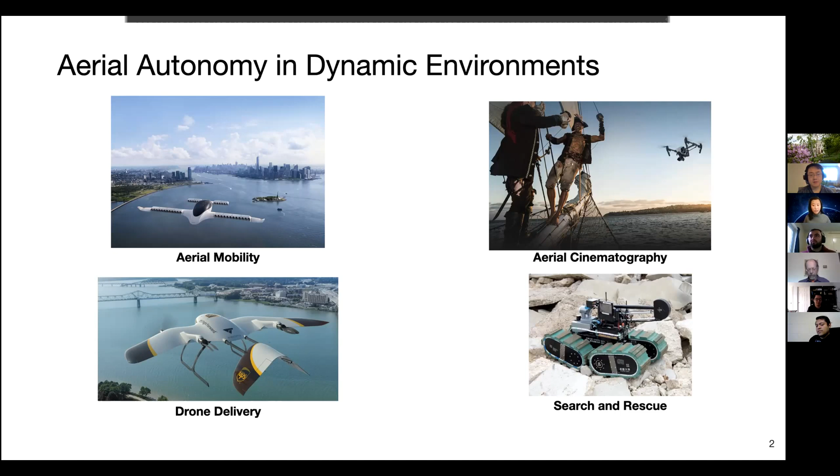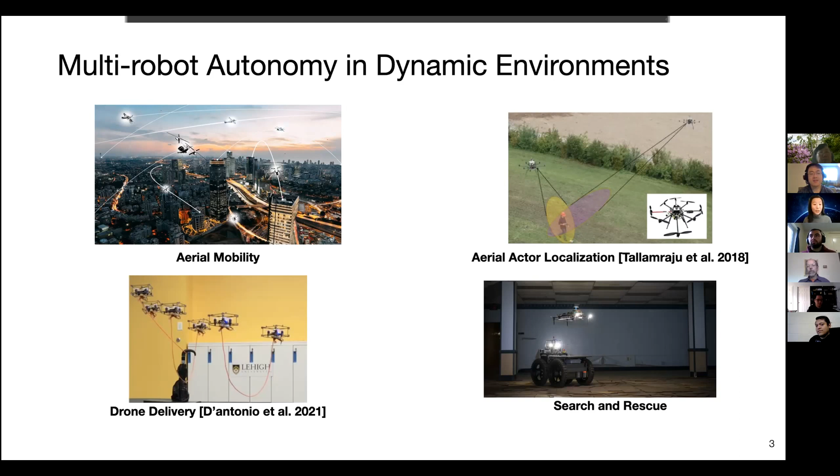More recently, we've been seeing a huge push towards multi-robot autonomy to dramatically increase the productivity of our autonomous agents. For example, to dramatically reduce search and rescue time, as shown in the bottom right image, which is our lab's DARPA SubT effort. It can also increase possible loads carried by drone delivery robots - I saw this from one of your lab mates' recent work - to scaling aerial transportation for mass use.

At the crux of all these dynamic applications are three key desired properties: safety, real-time computation, and high performance. These vehicles will need to work within close proximity to humans, such as in the cinematography application, navigate between buildings, above pedestrians, under high wind conditions, or fly in close formations to each other, which has unknown aerodynamic effects. While doing so, they need to actively reason around safety. Second, the vehicle will receive new information and must make these decisions in real time. Thirdly, vehicles need to make high quality decisions to avoid inefficiencies that may lead to mission failure.

Later, we'll also see how these properties are at odds with each other, as I'm sure we all have to optimize and hand tune sometimes. These properties and their optimization become even more difficult to achieve when extending to multiple agents.

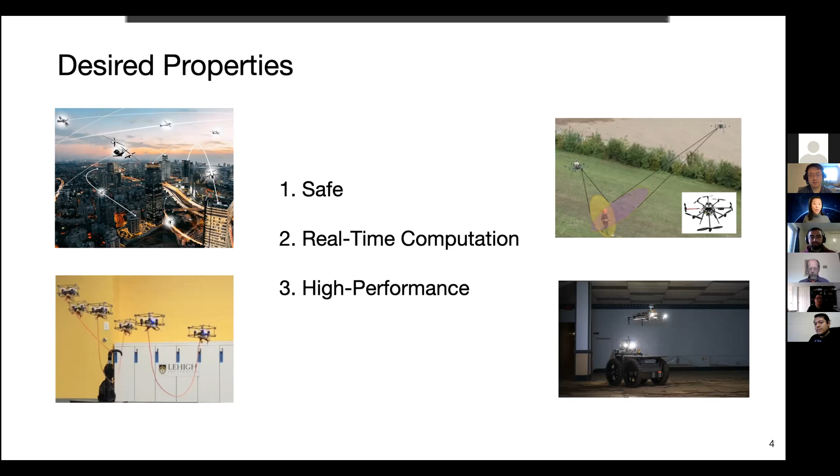To ground this talk, I'll be using a motivating application that we're working on to generate millimeter level reconstruction of dynamic actors with autonomous flying cameras. This is a joint NSF-NRI project with University of Minnesota. We're mainly motivated because we find limited methods to accurately measure dynamic group activities in their natural habitat, with most methods reliant on GPS markers or within indoor environments.

So we hope to break this technology out into the wild to bring a FlyOptic Studio, where the grand vision is that our system can take a single autonomous capture of animals or humans in their natural habitat to later generate infinite post-hoc views.

This will require many viewpoints while reasoning around natural obstacles and uncertainties. We're motivated by strong applications in biological tracking, where we are excited to better understand fine movements of wildlife animals, to entertainment, where we can post-generate infinite camera views in the editing stage, or even to computer vision as a scalable system to collect high-quality 3D data for data-driven models.

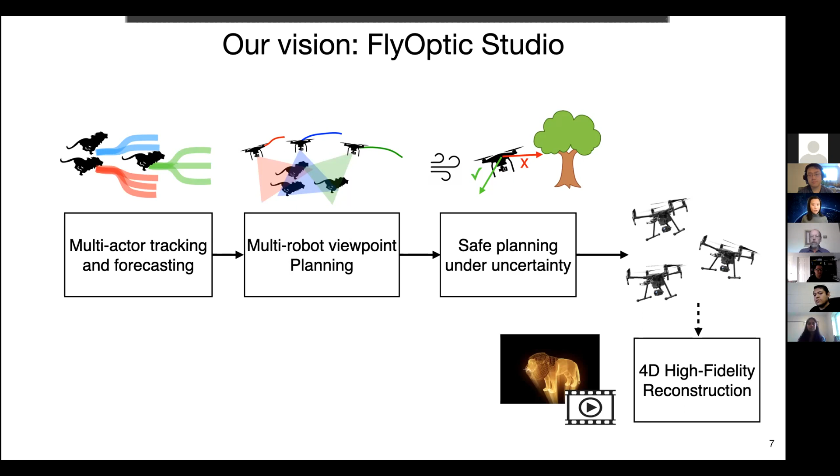This is the first year of the project, and in this talk I will focus on our work on multi-robot viewpoint planning and also safe planning under uncertainty.

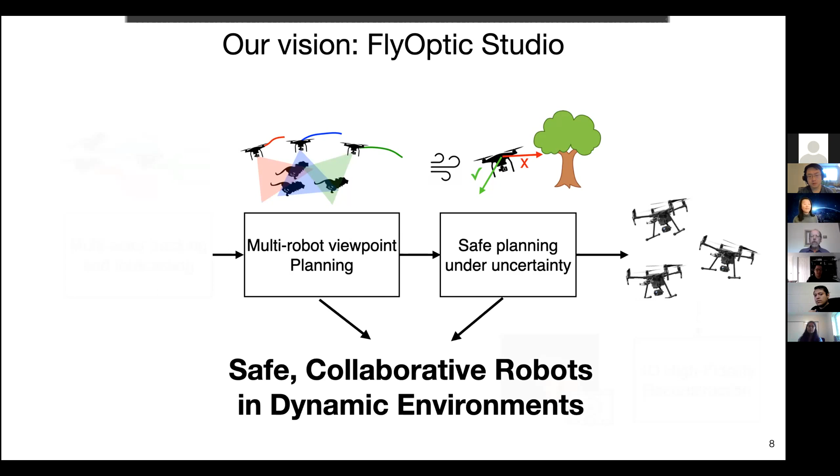The desired properties of our autonomous system are that it exhibits safety, real-time computation, and high performance in dynamic environments. For the multi-robot viewpoint planning case, it is a dynamic actor, and for the safe planning, we focus on the scope of varying external disturbances.

To address this general problem of safe collaborative robots in dynamic environments, I will present two works. First, a collaborative aerial camera coordination scheme for reconstruction of a dynamic human amongst obstacles. Second, to ensure safety under varying uncertainties, I'll introduce adaptive safety margins under time-varying disturbances. These two works are currently separate, but we hope to bring them together to achieve our vision later.

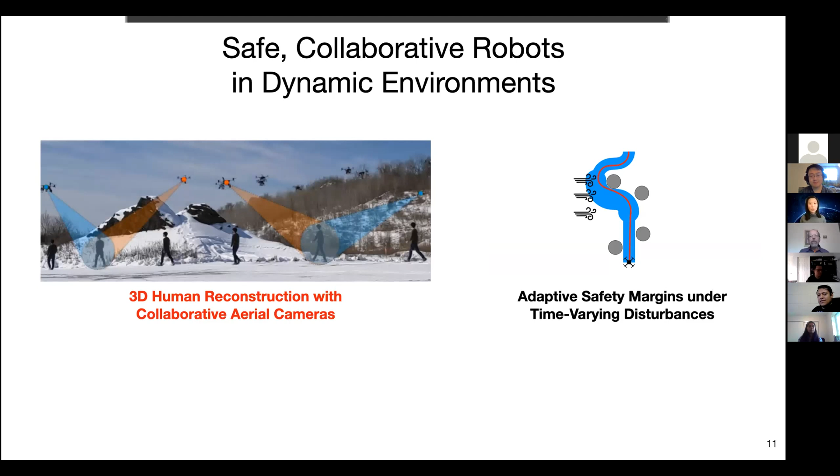On to our first work on multi-robot viewpoint planning for 3D human reconstruction. In this work, we address the question of multi-camera planning for best skeletal reconstruction of an actor amongst obstacles.

We show that we can reconstruct dynamic actors, such as this jogger below. This was tested in one of our forest testing environments a month ago in heavy snow. We were also able to reconstruct people doing jumping jacks and playing soccer, which I'll show in some videos later.

Towards this problem, we're inspired by works from several topics, spanning from static site reconstruction to active planning for aerial cinematography. However, current work does not address the entirety of our dynamic human skeletal reconstruction in the wild problem.

First, at the top left corner, there has been a wealth of work, especially in active planning, on reconstructing static sites, often using an information gain formulation to maximize coverage of complex geometries, like this building. This differs from our application, since robots generally have a long time to scan an area and collect many viewpoints, whereas in our problem the reconstruction surface changes at every time step, and we can only collect information at that instance.

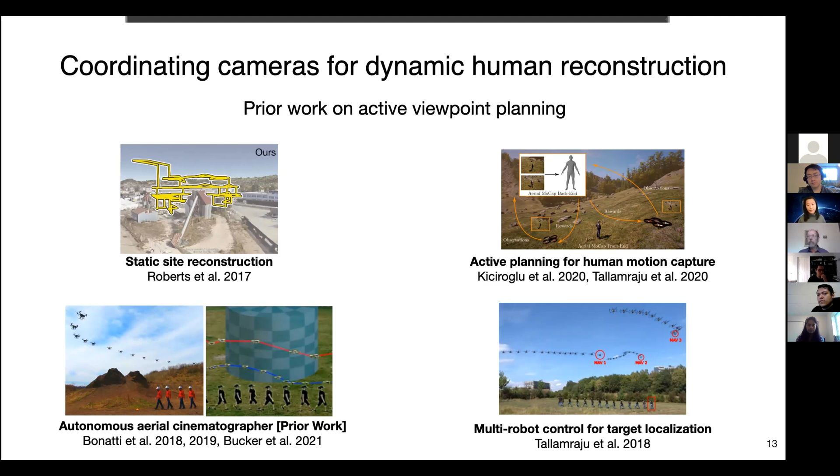Breaking apart this geometric problem, why is it exactly hard to solve? We can think of a standard scenario where we have drones tracking one dynamic target. The distinctive challenge of developing an autonomous reconstruction system for dynamic actors is the need to compute high quality simultaneous viewpoints amongst obstacles while staying safe.

We break this challenge into four main factors that we later encode in our problem formulation. First, maintaining safety. This is the primary objective of our autonomous system, where the robots must stay safe from each other, from obstacles, and from the actor.

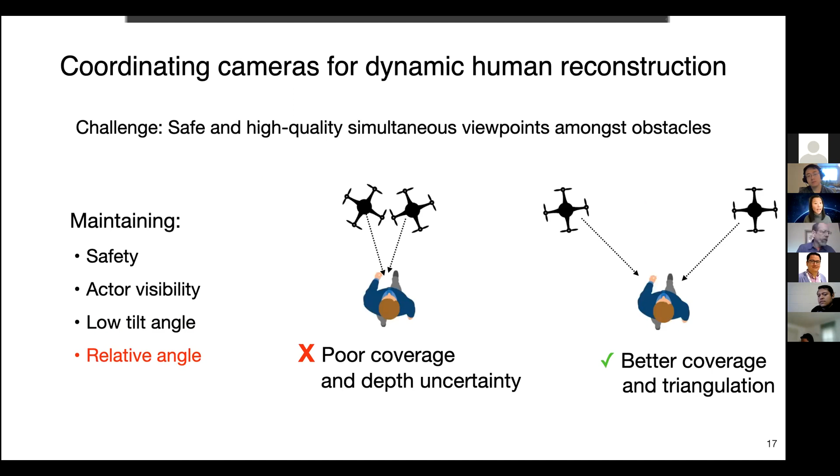And then lastly, given a limited number of UAVs, we would like to maintain relative yaw angles between UAVs to give the best information for reconstruction, where we need a good balance between good coverage and overlap. Coverage in order to represent most of the bodies, while overlap in order to maintain correspondence for alignment.

For example, to the left, we have here where the baseline is too small, resulting in poor coverage of the reconstruction, and also at the same time, uncertain depth due to triangulation error. Whereas when the relative yaw angle is too wide, it does not provide enough correspondence for 3D reconstruction.

And these we actually had to learn the hard way. We collected some field tests and then it did not work well for our reconstruction method. So this value is of course driven by the different reconstruction method, and I will talk more about that later.

So encoding these four intuitions and challenges, we formulate a trajectory optimization problem to find a set of trajectories with minimal total cost. This is represented as a weighted set of cost functions that balance robot safety and motion smoothness against visual occlusions of the actor from obstacles. In addition, we introduce an objective J4, which is to encode the multi-camera collaboration formation that strives to keep it optimal for reconstruction over time.

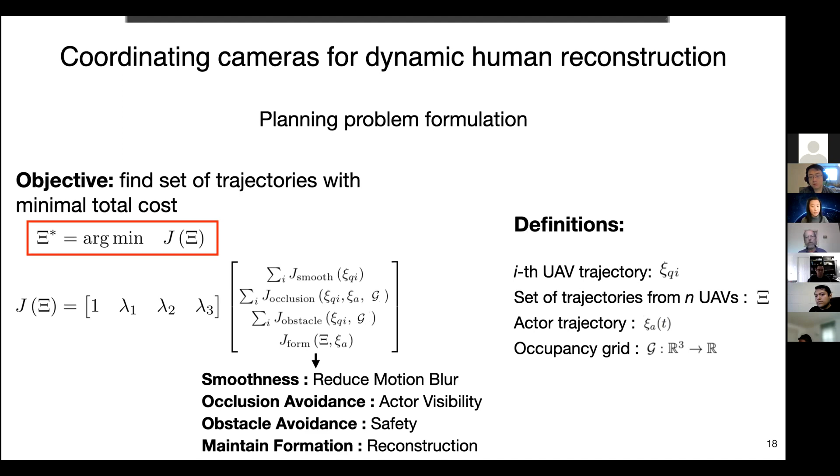So our key idea to balance all these objectives is to plan best formation path over a long time horizon using a two-stage approach. By reasoning over a long time horizon, we're able to generate good simultaneous viewpoints amongst obstacles and avoid myopic trajectories. And our two-stage approach allows us to dramatically reduce complexity so we can adapt very quickly to highly dynamic targets while providing smooth trajectories.

So see here in our cartoon, we see the input to our planner: a map which we have the trees, an actor forecast, which is the black dashed lines, and also the current UAV states. So first, we plan discrete viewpoints using a centralized formation planner on the lead drone. And then in each UAV, the discretized viewpoints is then optimized for a smooth trajectory that is later tracked by the vehicle.

Excuse me, just one simple question. Do you know the trajectory of the person?

Yeah, so we forecast the actor motion by using purely visual detection and then a Kalman filter based on their previous velocity. Okay, but that's for a short time interval, right?

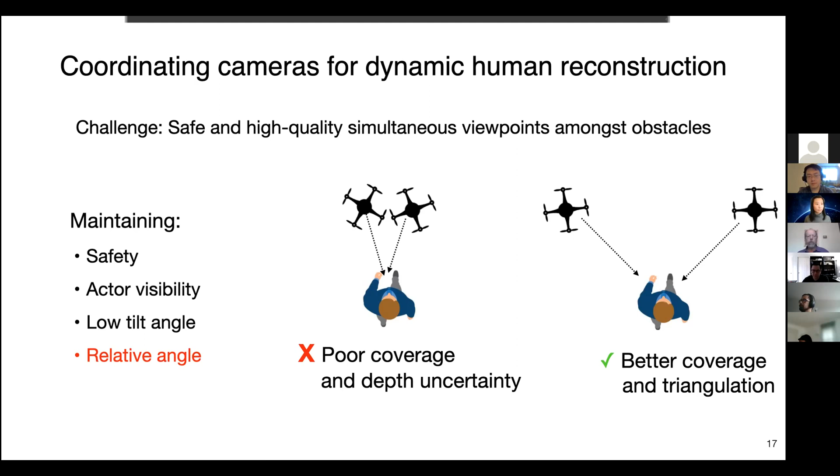So just as a quick reminder, we propose a centralized-decentralized approach, and now I'm going to dive a bit deeper into these.

To minimize the skeletal pose reconstruction error, the ideal camera formation we found should maximize the angular distance between the multiple cameras to minimize the triangulation error.

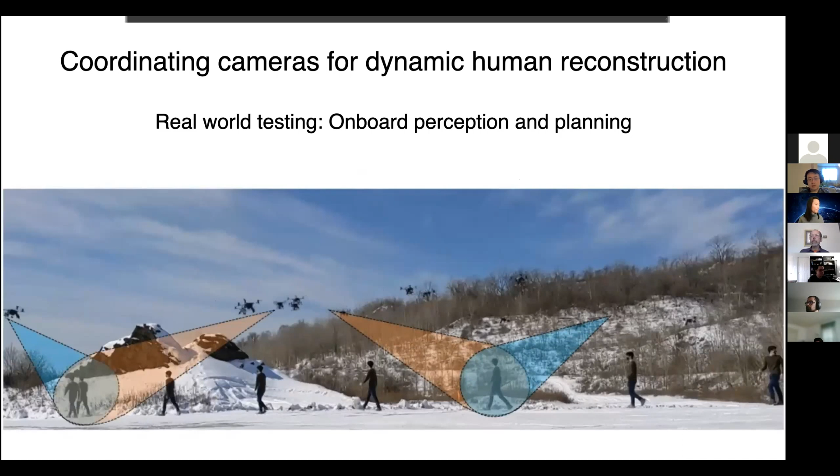This shows the time lapse of the previous trial, where as the formation rotates around the obstacle, it is able to maintain a low tilt angle.

To do the reconstruction, we use AlphaPose, a 2D skeletal key point estimator, to estimate the joint locations. Then we fuse the measurements from the 2 drones with linear triangulation to estimate its 3D position.

We see here our formation planning renders consistent skeletal reconstruction. We compare this to a fixed formation that does not rotate.

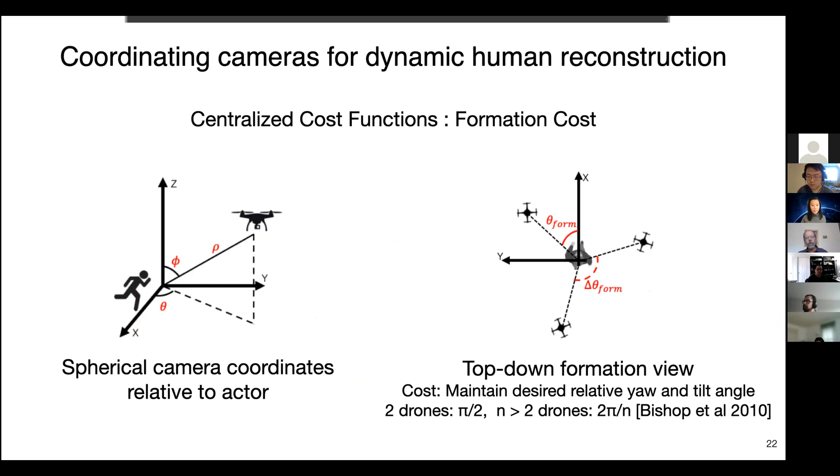Similar to here, really fully using the discretization space in order to allow for 10 drones. However, one interesting problem would be that by simplifying it to a ring of formations, we make viewpoint selection much easier because we can predict how the multi-view reconstruction would work. So by expanding the state space, we might need to use more data-driven methods to calculate the predicted reconstruction quality.

I see, yeah. And have you seen some works where, instead of discretizing the circle, it works in the continuous space when the robots push against each other? You mean in the multi-robot planning space, or? Yeah, for target tracking, when you want to track a target with multiple robots.

I have seen multiple works in the continuous space. This was the first one that I see discretizing the space. I was just curious if you took them into account, or what is the advantage of your approach? Yeah, so the main advantage of our approach is how quickly we can plan.

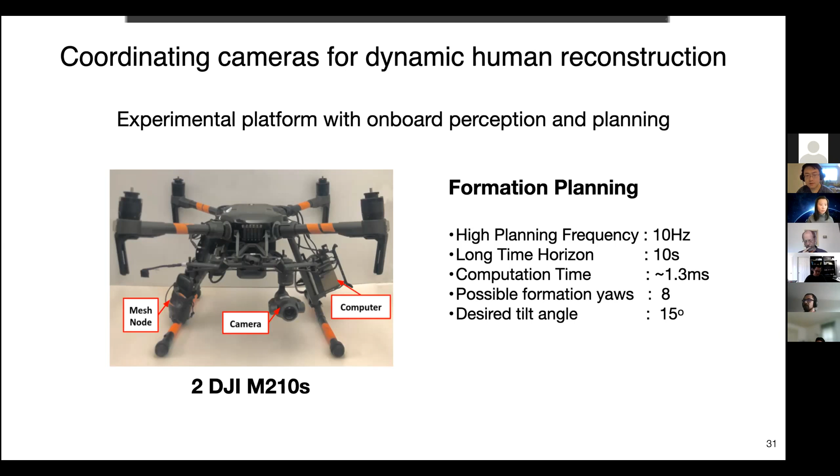I had a question before we move on. We have time. Because you discretize the system, and even if you don't discretize, it seems like your formations will be constrained by obstacles. For instance, if the subject goes through a narrow corridor, you might not be able to keep the 90-degree angle between them. So that suggests a non-discrete version of this. Have you thought about things like this? I would assume this would happen when you want to deploy this in urban environments or forests, where the density of obstacles is much higher and has more complex shapes than the open field shown in the videos.

Yes, that is a huge consideration of ours right now. Ours is limited to, I think, some of the obstacle environments. However, we have tested our discretized approach in AirSim, like in urban environments, where I think the main limitation on our end right now is the constraint on the formation angles. So by relaxing that formation angle constraint, which we have locked at 90 degrees, we are able to use our discretized planner in order to plan paths even in very cluttered environments.

And the second question I had is somewhat closely related: have you thought about applying this to disaster scenarios, like deploying in a fire, for instance, or inside a building, where you would have to track or monitor people to give feedback to first responders? Is that something you thought about? Is that interesting? Yes, definitely.

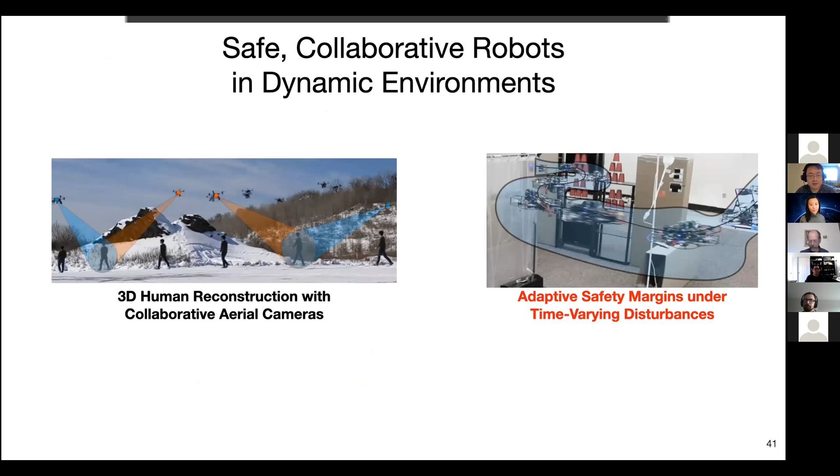Right now I'll introduce my second work, which is adaptive safety margins under time-varying disturbances. Safe real-time navigation is challenging because we need to work with uncertain vehicle dynamics, variable external disturbances such as wind, imperfect controllers, unforeseeable actuator and perception uncertainties, all while reasoning around these with very low compute.

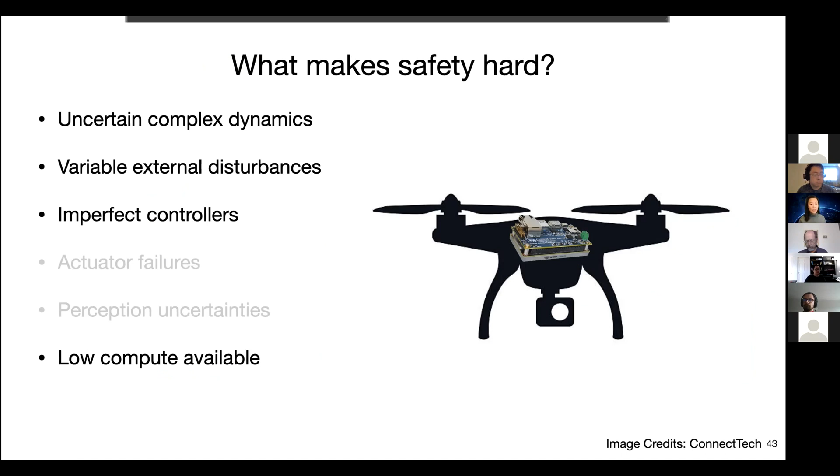In this work we focus on these four challenges, which represent a majority of the failure cases. Our work addresses these four challenges by enabling safe real-time planning amongst varying disturbances. Here we see our quadrotor successfully avoiding an obstacle under wind by adapting its safety margins, and once it senses no wind, it adaptively decreases the safety margin.

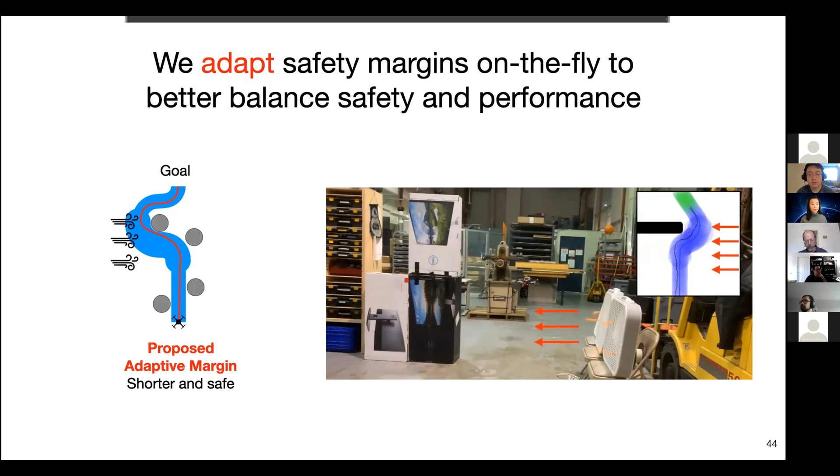The key effect of these four challenges is tracking error, which is the vehicle's deviation from the planned path. You can see here in the video the quadrotor crashes despite a collision-free planned path, which is shown in blue.

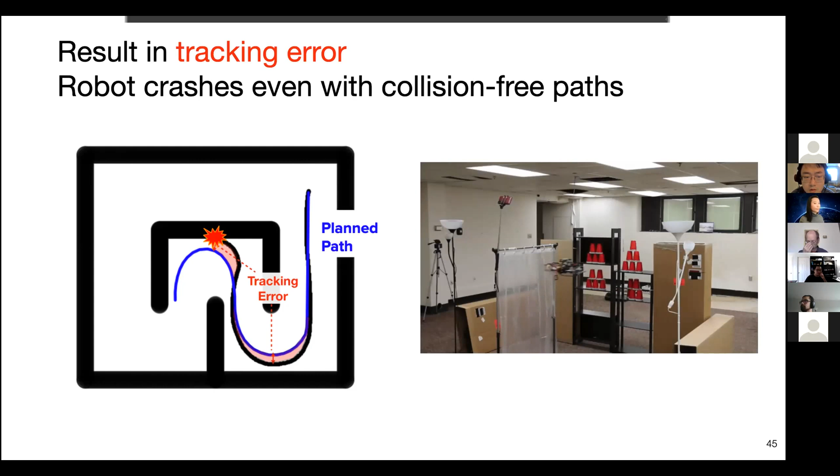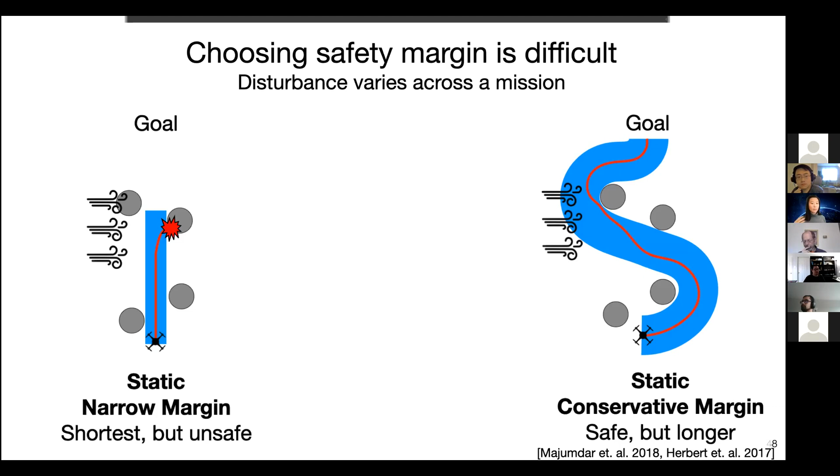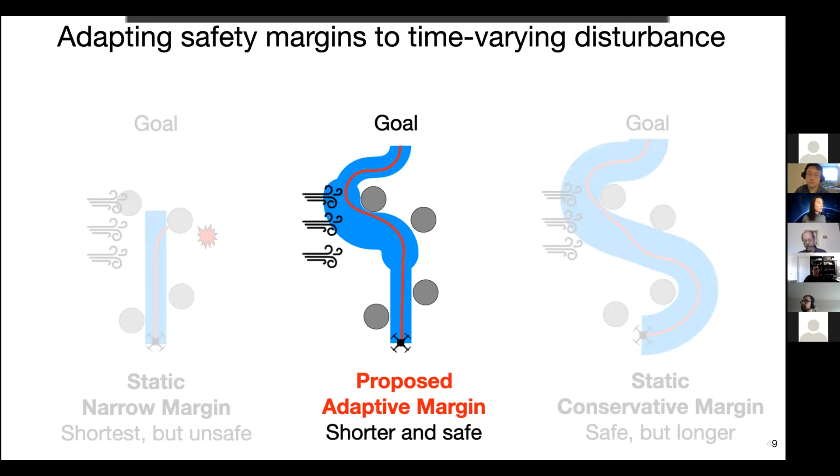On the other hand, many prior works compute worst-case margins by assuming all experienced disturbance is always at a maximum level. However, this may be too conservative for most real-world situations where most of the time the experienced disturbance is far less. In this work, we go beyond static offline margins to adapt pre-computed margins on the fly to better balance safety and performance.

A bit on the problem formulation: we formulate our problem as follows, where given a reference trajectory, we find the most similar trajectory for the vehicle to follow to remain probabilistically safe under the current disturbance. Note that the reference trajectory does not have to be obstacle-free.

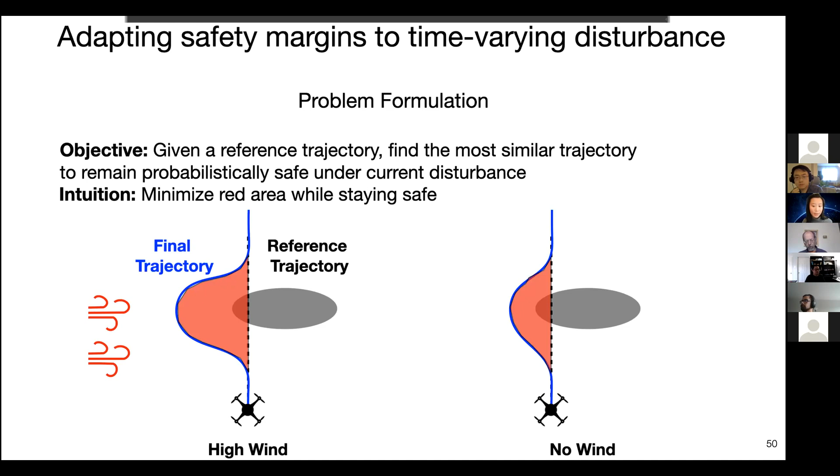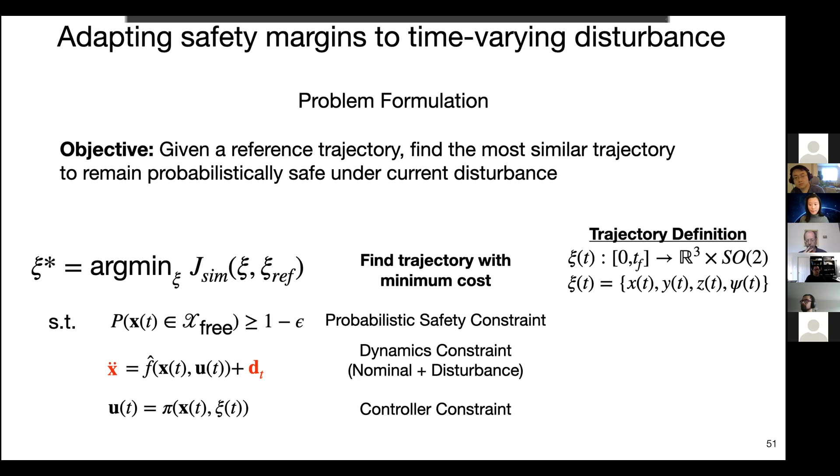Formally, we find a trajectory that minimizes a similarity cost while under a dynamics, controller, and probabilistic safety constraint, and we consider disturbance as acceleration since we often model disturbance in drones as force. Our key insight is treating this as a surrogate problem of estimating the safety margins under the current disturbance, where we write the constraints as a tube around a trajectory representing the set of likely vehicle positions, similar to a reachable set defined by the margin radius.

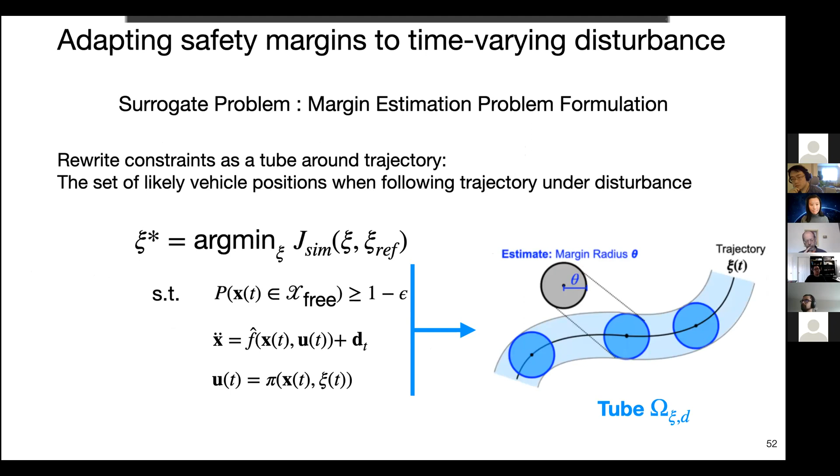To solve this overall planning problem, we split it into two steps: an offline step to pre-compute margins for multiple disturbance ranges to solve the surrogate problem, and then online, we estimate the current disturbance information to query margins for safe real-time planning under time-varying disturbances.

In the offline stage, we build a margin lookup table indexed by a motion primitive and a disturbance variance. For each combination, we solve the surrogate problem to find a margin by simulating possible trajectories and fitting its margin. The final lookup table of margins is then used during replanning for collision checking.

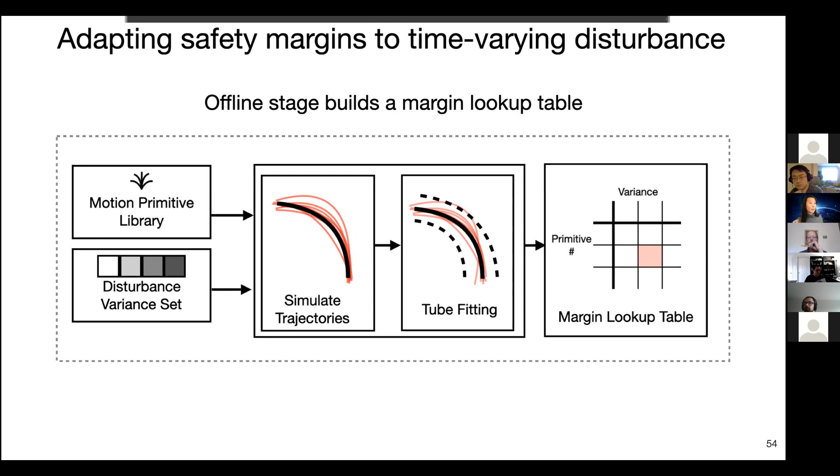We choose to discretize the possible action space into a preset motion primitive library, which is commonly used for mobile robots. By choosing a predefined set of trajectories, we avoid needing to generate these trajectories online, which also reduces our trajectory search space, drastically reducing planning time, and importantly for our application, allows for a fixed set of pre-computed margins.

In this work, we use a library of constant linear velocity, angular velocity trajectories, defined by its linear and angular velocity and a time horizon. This method can extend to more dynamic trajectories, however, this will increase the size of your trajectory library, so there is a trade-off.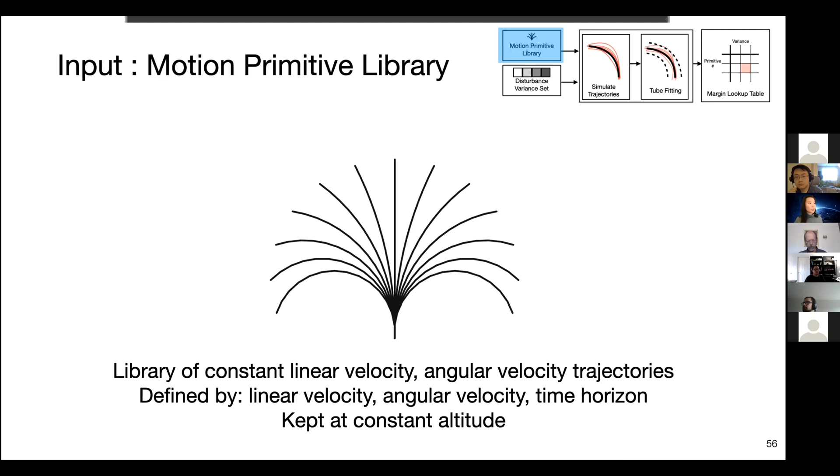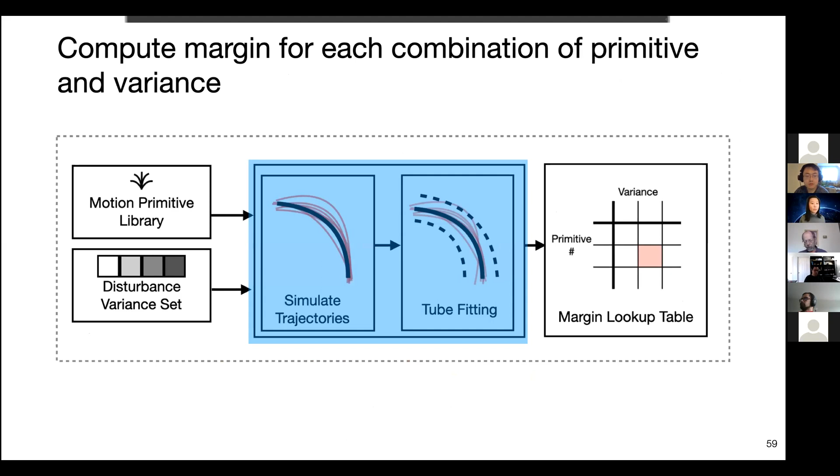Now with the motion primitive library and disturbance variance range set, for each combination of primitive and variance, we will compute a margin that describes our vehicle tracking error.

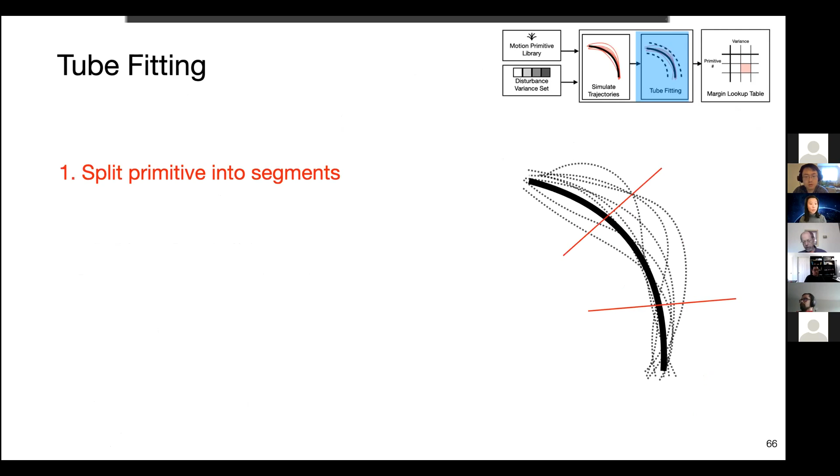Because of time, I'll quickly go through where we essentially forward simulate the trajectories given our disturbance model and our predicted vehicle model. Then this simulation for a specific primitive and variance combination goes through, and we fit a margin to that set of possible trajectories.

It comes with 3 key stages. First, we split the primitive into segments. Then for each segment, we fit a normal distribution to the cross-track error and select a margin given by the desired confidence. In order to be conservative, we choose the maximum over all segments' margins. Then we repeat this margin estimation process over each combination of primitive and variance to build a margin lookup table.

Now equipped with our margin lookup table, I'll describe how we use this for replanning given a reference trajectory and map. First, we estimate the current disturbance variance using online information. Then we query the column of margins corresponding to that variance, and within those primitives, we choose the collision-free primitive that has the least cost.

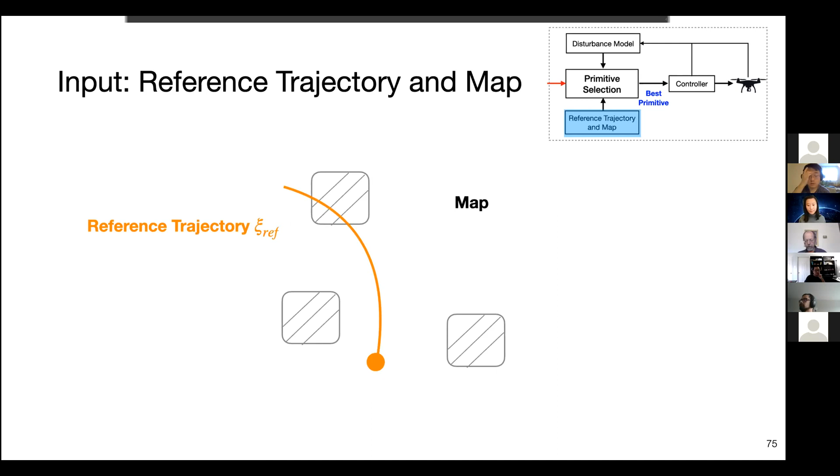The input to our replanning step is a map and a reference trajectory. So our first step online is to estimate the disturbance variance. We use a 9 degree of freedom quadrotor model and measure the disturbance based on the difference between actual and expected acceleration. Then the variance is a moving variance around 0 of the past disturbance. While simple, we note that the moving variance will cause a delay in our overall reaction time, and in the future, we hope to use a more predictive method.

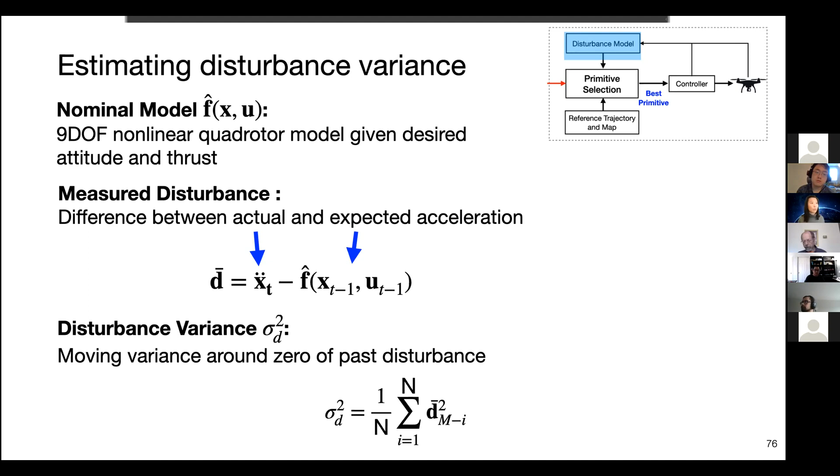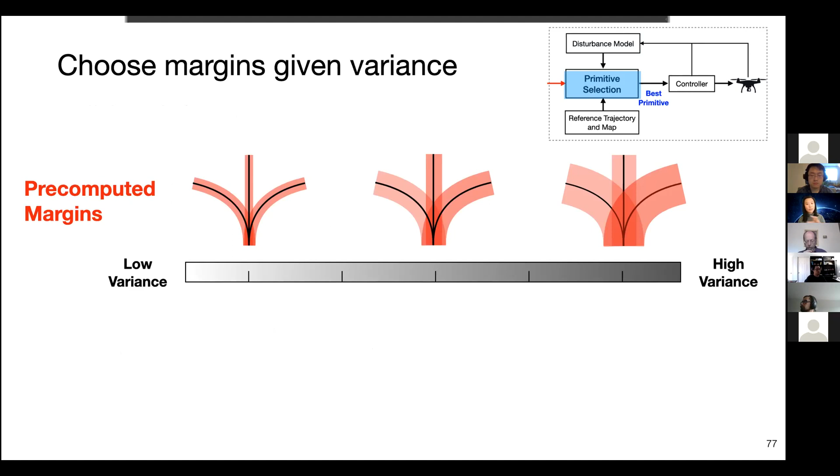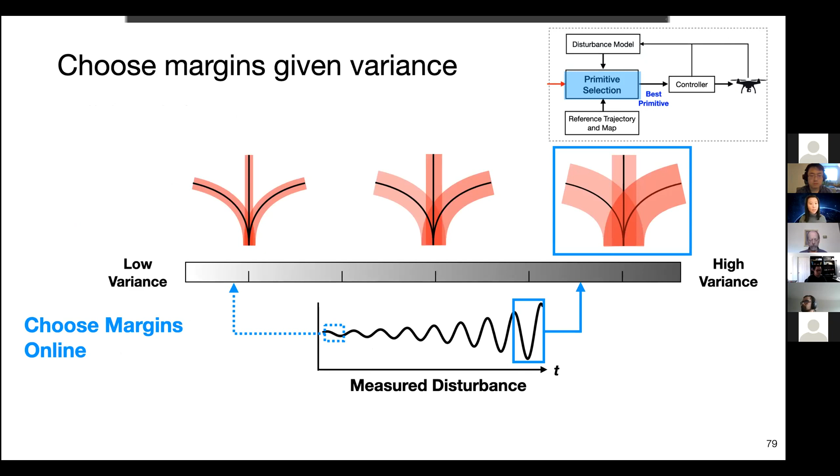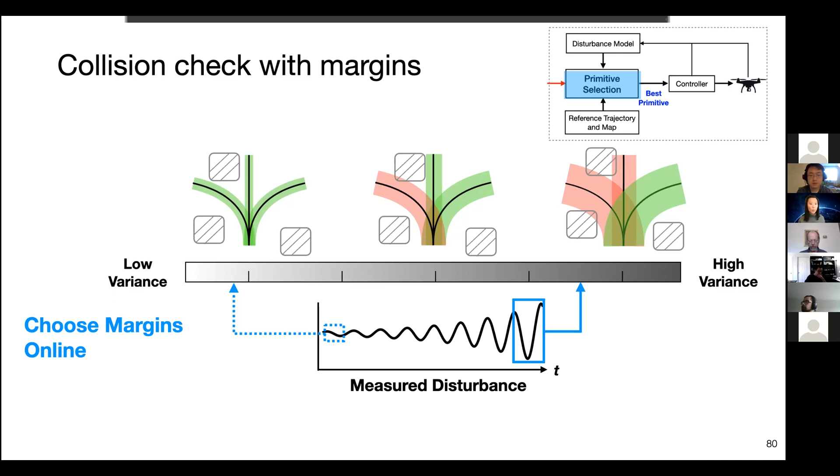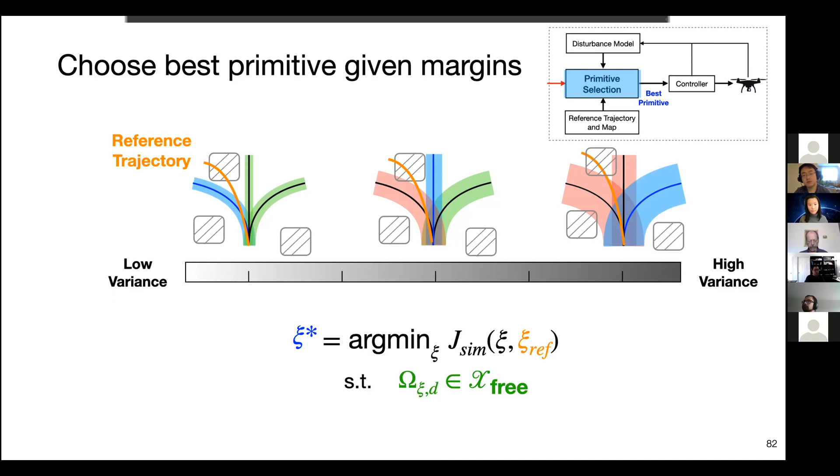Here's back to the overview of our offline-online approach for real-time adaptation. We first start with a simulated ablation analysis, where we independently test our key module, the margin lookup table, for online planning. We give our quadrotor a straight reference trajectory through a pair of columns to travel under time-varying disturbance. A trial is successful if it reaches the end of the map without crashing.

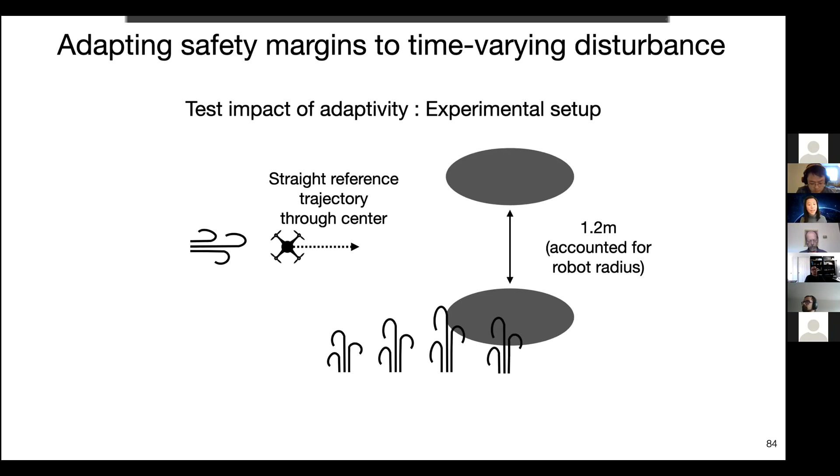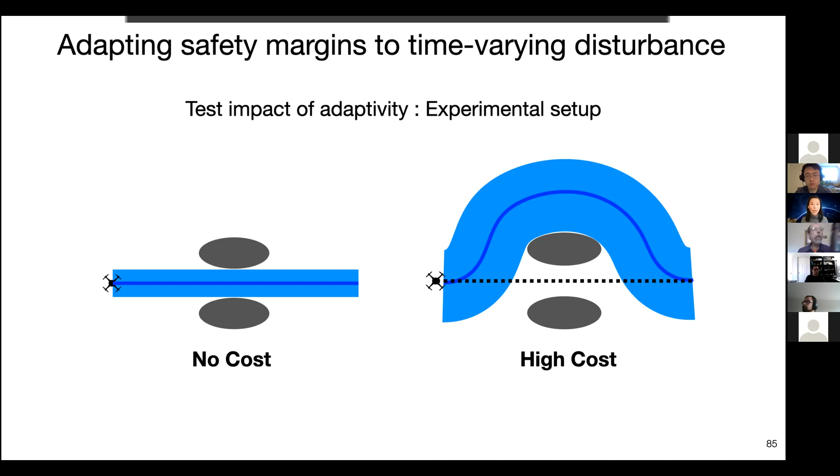So we set up a map to clearly evaluate the effectiveness of the margin size to balance safety and performance, where when the margins are narrow, the reference trajectory is followed, hence cost is 0. While when the robot goes around the obstacle, the executed trajectory is far away and has a high similarity cost.

So we compare our method to baseline static margins, which are the same computed margins, but locked at a static low variance, and another one at a high variance.

So we see at a low turbulence intensity, the plot shows that in the lighter shaded region, the computed tubes, and in the solid line, the vehicle's actual odometry. And in this case, as expected, our wide static margin goes around the obstacle, which is overly conservative, while our

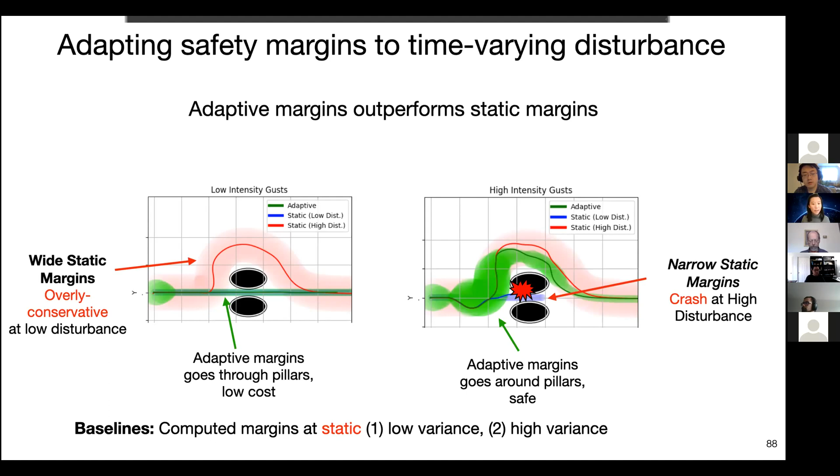adaptive margins goes through the pillars for a low cost trajectory. And at a high intensity gust, our vehicle with narrow margins crashes due to high disturbance, while our adaptive margins adjust its margins online and therefore chooses to go around the pillar, thus staying safe.

And to further test the robustness of our method, we use a larger map with 3 series of columns. And in blue, you can see an example of our adaptive margins of our system, where in the same mission chooses to go through the gap when the disturbance is low and around the obstacle when disturbance is high.

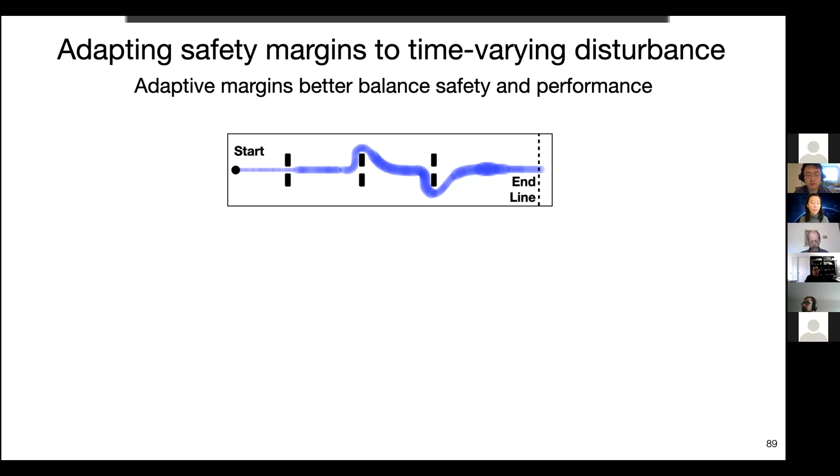We again compare our performance with the static margin methods under increasing level of turbulence, marked as L, M, and H, so low, medium, and high. And each data point in the safety trade-off curve is an average result over 10 trials in randomized disturbance sequences.

So for the narrow static margins, it remains in the vertical axis at the right, where the performance is high, but it's not robust to high turbulence intensity, thus crashing in 30% of the trials.

While for the wide static margins, as expected, it is very safe. However, because it chooses to go around the obstacles, even when the disturbance is minimal, therefore it is at a low performance regime.

Our adaptive margins dynamically computes best margin given current disturbance, resulting in lower cost than the wide static margins while maintaining safety, getting us closer to the goal of being in the top right of this chart.

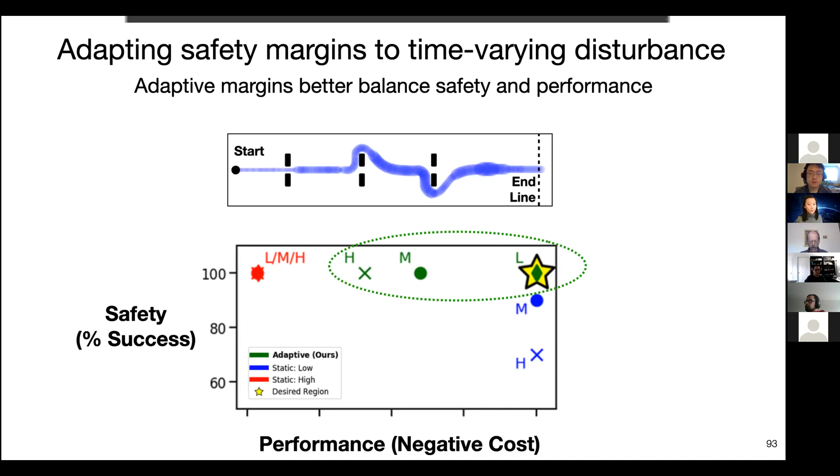So with the simulated validation, let's repeat again our real-world result, where we test in the real world with a varying wind field to show if our adaptive margins do better balance safety and performance under time-varying disturbances. We use a custom quad rotor with an Intel RealSense for state estimation and a TX2 on board for planning.

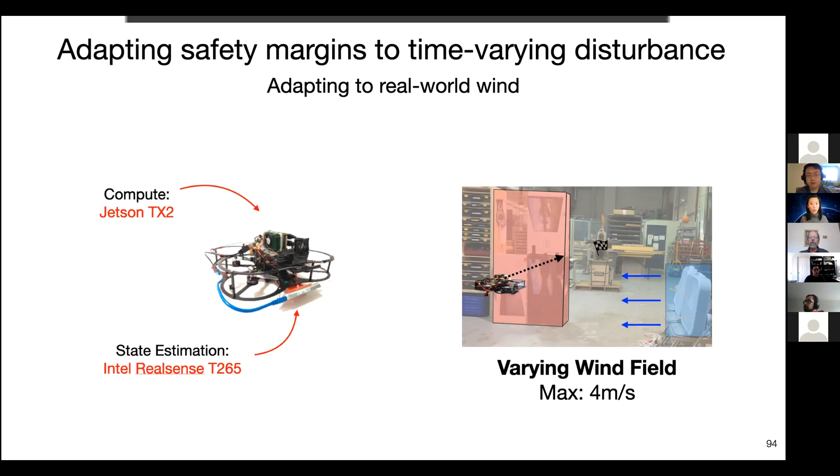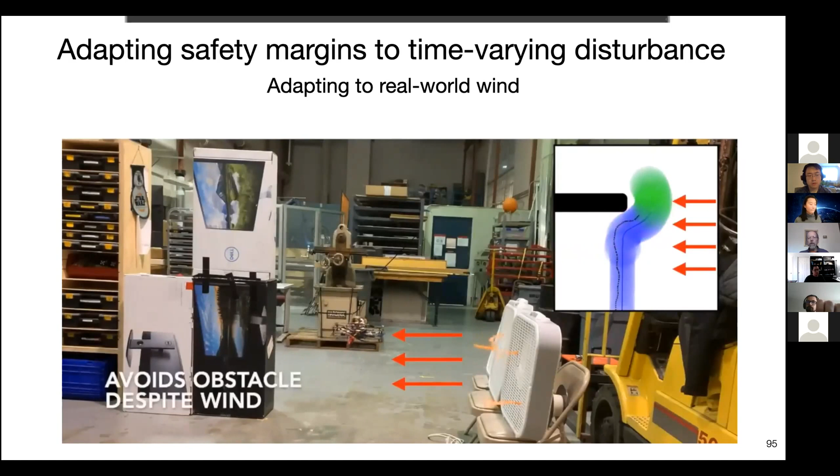And here's again the video I showed earlier of our system adapting to wind. Our margins increase as it sensed wind successfully, avoiding the obstacle under disturbance. And once out of the wind field, the margins dynamically decreases.

And in contrast, in red is the quad rotor with our hand-tuned static margin. Under the heavy wind, it leaves its margin and crashes. We note that likely due to the slight difference in height, the quad rotor with the static margin actually experienced less disturbance from the wind than our adaptive margin trial. And yet it still crashed, showing the robustness of our method to higher disturbance.

So now stepping through the adaptive margin result, the red line on the right side plot shows the disturbance standard deviation that is used to look up the margins. And at A, we can see that it starts at a low disturbance.

And at B, when it encounters wind and experiences a high disturbance, the margins dynamically increase in size to move the quad rotor away from danger.

And finally, at C, we see that the vehicle successfully avoids the obstacle and decreases its margin as disturbance has lowered.

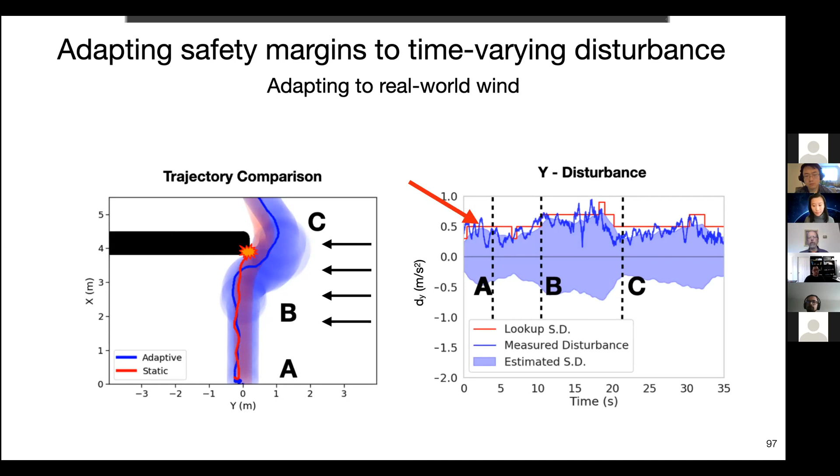So in the future, we lay out 2 key steps to bring us closer to addressing safe real-time planning under varying disturbances. First, our method currently relies on our underlying distribution in our Monte Carlo step to reflect the real world. While we show promising results, we hope to extend our framework to robust adaptive replanning, where instead of needing to define our own underlying disturbance model, we take the same idea in our framework and pre-compute margins for multiple worst case bounds. This also allows us to better handle disturbance bias where our current distribution remains zero-centric.

Second, we want to address the issue of no solution being found when disturbance suddenly increases.

For example, this can happen when our quadrotor uses a narrow static margin to go through a narrow hallway, and suddenly experiences large aerodynamic effects. With that, all margins would increase such that no primitives are collision free. So staying still is not necessarily the safest option.

So one thing I'm interested in is formulating our problem instead as a minimum risk problem to address this issue. Second, we also hope to incorporate more predictive disturbance modeling to turn our reactive safety framework into proactive safety.

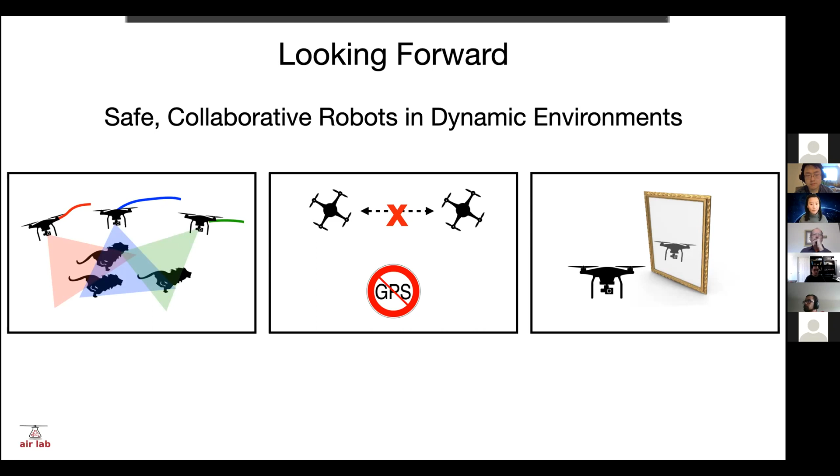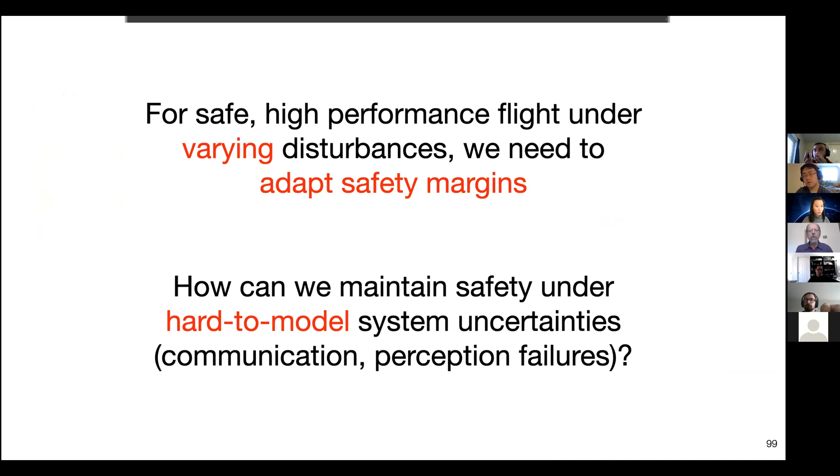Yes, definitely. I think one of the future work items is making this more predictive. So let's see if I understand your question correctly - I think what you're suggesting is also including in the disturbance prediction maybe the environment of the robot.

One concrete example can be a robot choosing between going through a narrow hallway or outdoors. A narrow hallway has a lot of aerodynamic effects, whereas outdoors, generally, unless there's high wind gust, it's actually safer to go. So by including that future environment state into the planning, I think it'd be really exciting to see it choosing to go around the outdoors instead of through the hallway.

Yep, thank you. And a way to do that I was thinking about is maybe just installing a bunch of these really cheap laser range sensors, and then seeing what the minimum distance to an obstacle is, and using that to model in different environments how well the aerodynamic effects work. You can then use that as a model which is queried based on distance to obstacle later.

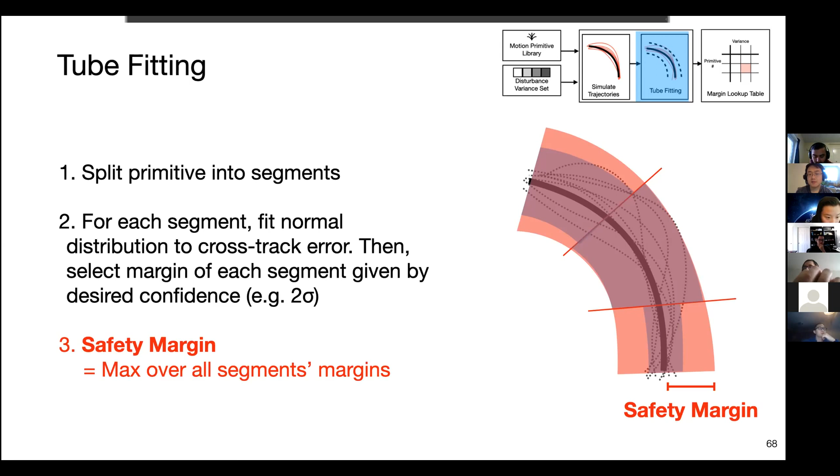Second, a more long-term approach would be lumping this into a more adaptive controller. There's some really exciting work I was talking about with UIUC, where they also add this to an adaptive controller, so that can itself already handle a lot of the major disturbances, while our dynamic tube can address the transient nature of the disturbance. So I think this would be more longer term, but to increase feasibility, this is what I would do by adding an adaptive controller in a robust manner.

That sounds good. My second question is regarding the offline simulation. So offline, you are doing simulations, right? Yes. But if you are doing simulation, there might be a reality gap between the simulator and the real environment. Do you see any problems there?

Yeah, so a key assumption of our margin estimation method is twofold almost. Whatever we're experiencing in the real world, that estimated variance is plugged into our simulated model, and that sim-to-real gap is low. We do see this in the real world. However, what I want to do is test this in more extreme scenarios, beyond just wind, and really quantify how big the sim-to-real gap is.

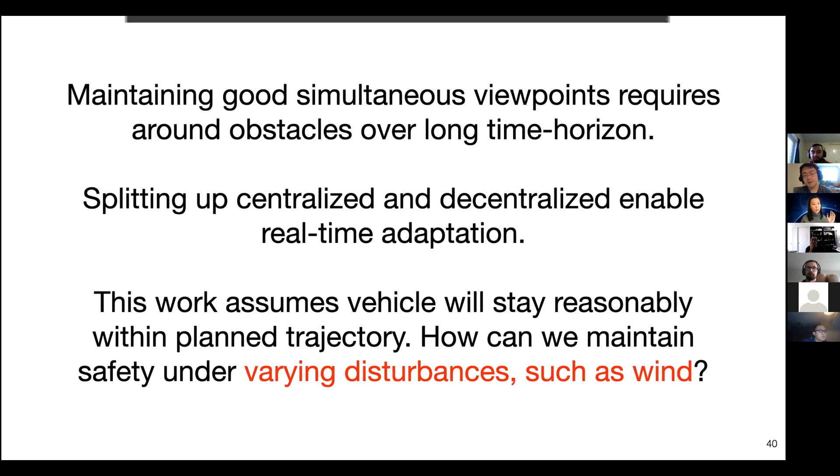Yeah, that's a great question. So I can talk through how I did my checks. First, as you mentioned, I wanted my vehicle, the original vehicle model, not even the disturbance model, to be as similar as I could to the robot model. So for this, I did pick a simplified model. And then mainly I looked at, let me just pull up the PDF. Sorry, one second.

So I did use a simplified quadrotor model. It does have rotation based on desired attitude and thrust, and I did my best to fit first-order roll dynamics and pitch dynamics to this.

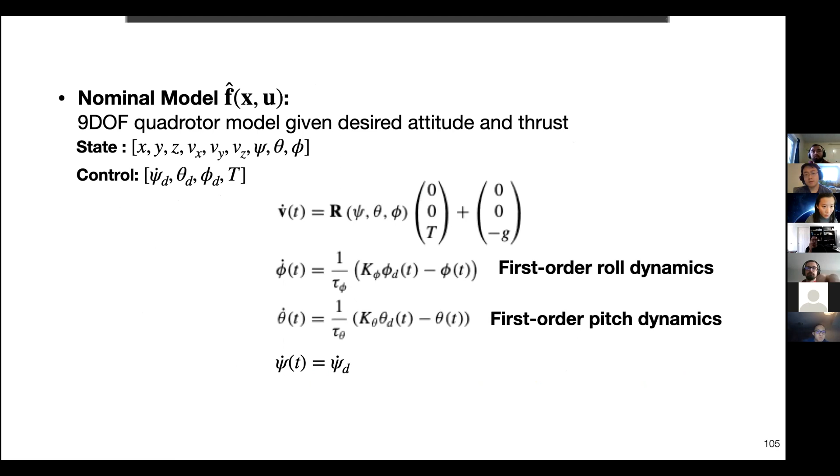Then secondly, on the disturbance model, let me just pull this up. The disturbance model, especially for the simulation, I took some training data, and then I evaluated what the frequency of that was, and that's how I determined the disturbance period. I felt that it lined up pretty well.

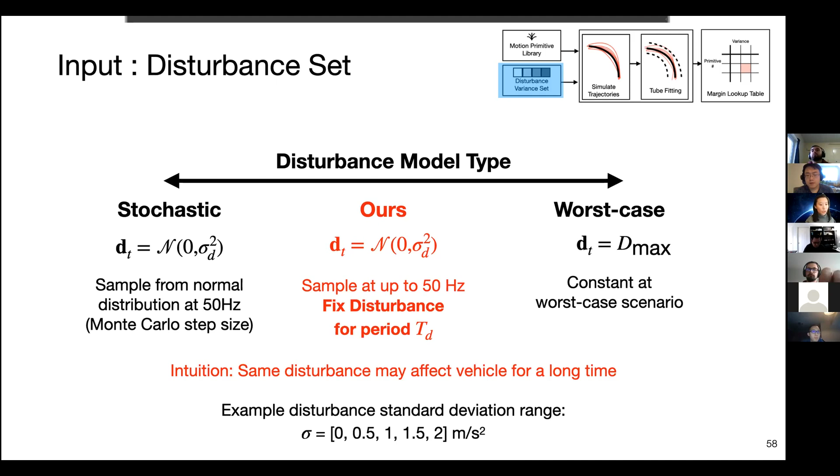However, I do think that in the future, I would like to rely less on disturbance models and be more model-free about it, because right now the disturbance is already trying to account for the model mismatch. In order to do that, I'd like to pitch going towards adaptive robust planning, where instead of defining these models, we use worst-case disturbances that you can query by maybe an overly conservative multiplier on the current disturbance. I think that would be a less model-based way for me to do this.